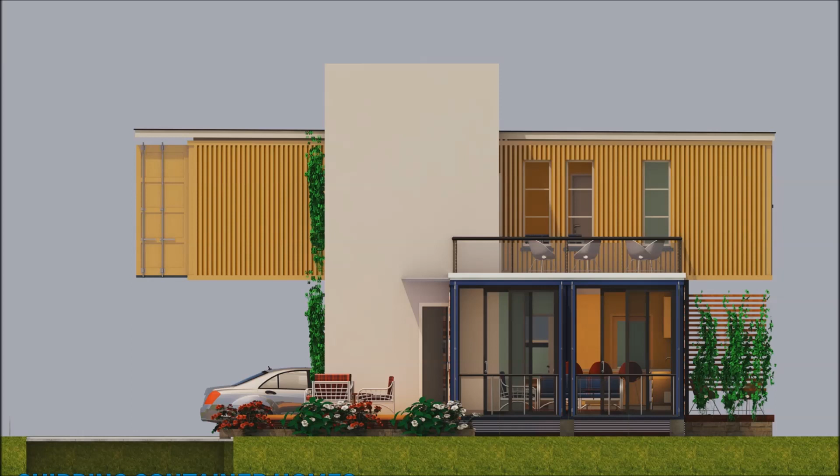This video brings to you CROSSBOX 1280. This is a modern shipping container house designed using four 40-foot shipping containers to form a 1,280 plus square foot house. This video covers a complete presentation of dimensioned floor plans, a cost estimate checklist, and detailed drawings you can download for free to use on your own shipping container house project.

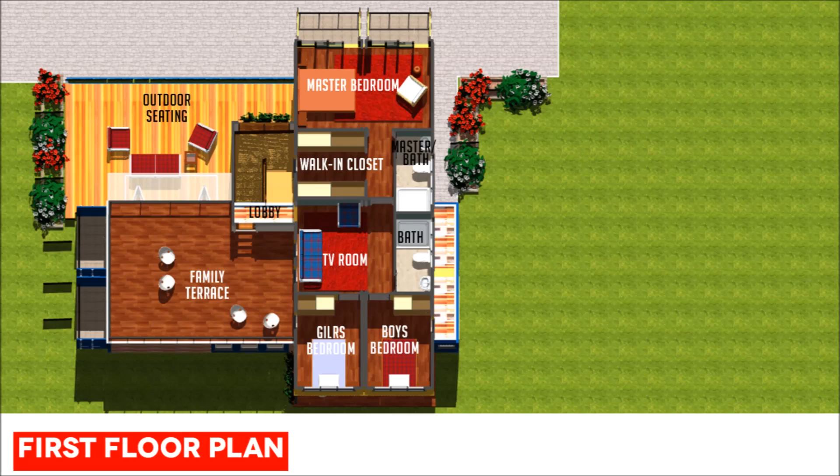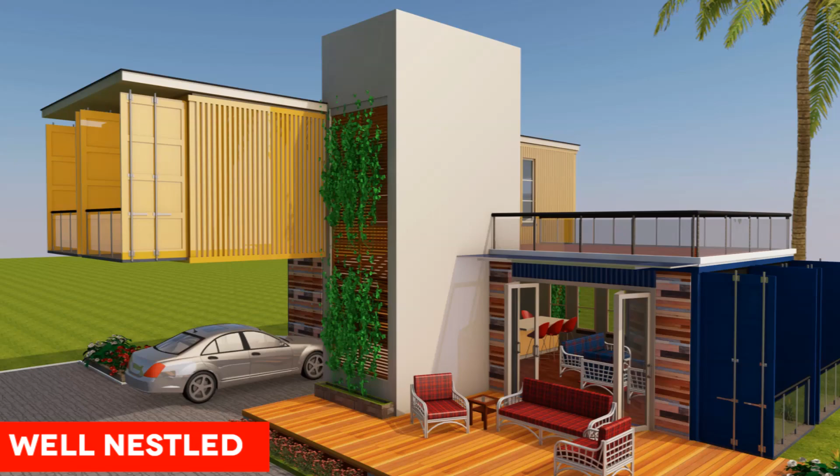The structure and design brief. This 5-bedroom, 1,280 plus square foot residence is made from 4 recycled 40-foot high cube shipping containers. 2 of the containers sit on a pier foundation and the other 2, stacked on top, perpendicularly to create a 2-storied house in form of a crossbox.

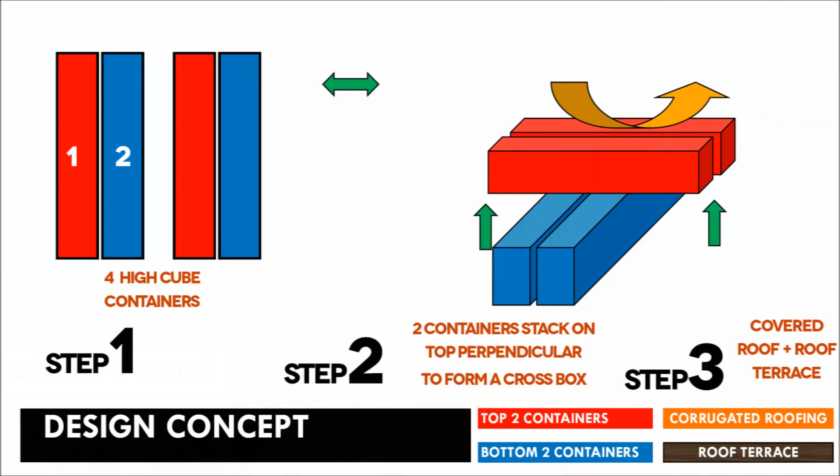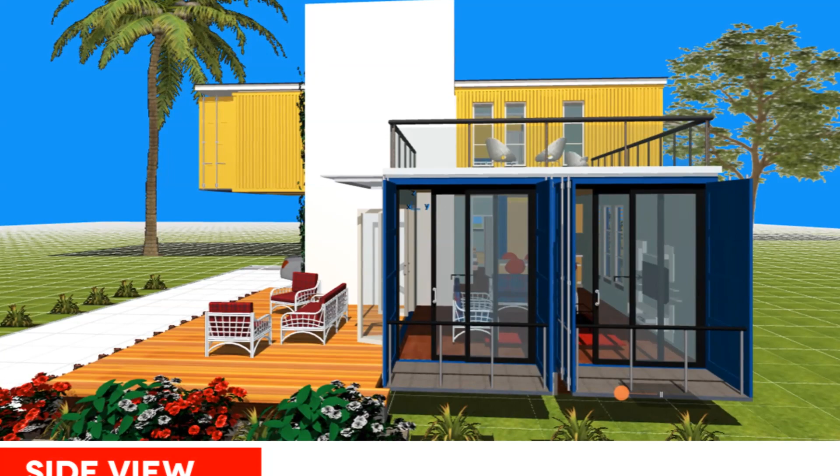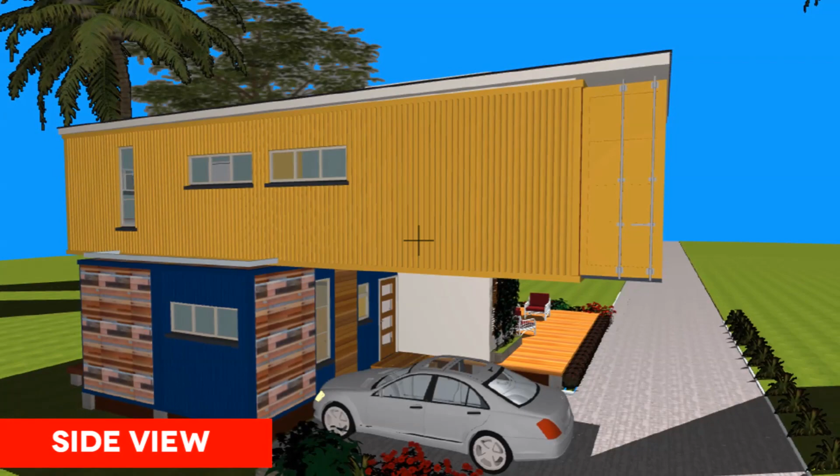The use of 2 containers is better in overcoming the challenge of narrow usable space of 1 container. The design uses high cube containers because they are 300 mm taller than a standard container. This provides an extra foot of ceiling insulation without compromising the headroom of the habitable space. The containers on the top are cantilevered midway to create a dynamic entrance porch and a carport. Another cantilever created at the rear of the building is used as a kitchen backyard.

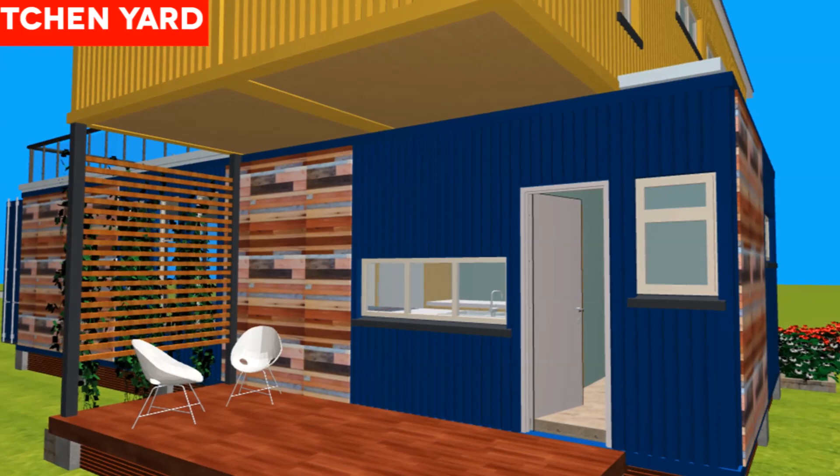The upper story is accessed with a hand-sculptured staircase, ventilated with timber louvered fenestration with green planted vines and climbers on the exterior. The staircase shaft acts as vertical circulation in addition to providing structural support to the cantilevered frontage. The top of the staircase is fitted with water storage tanks.

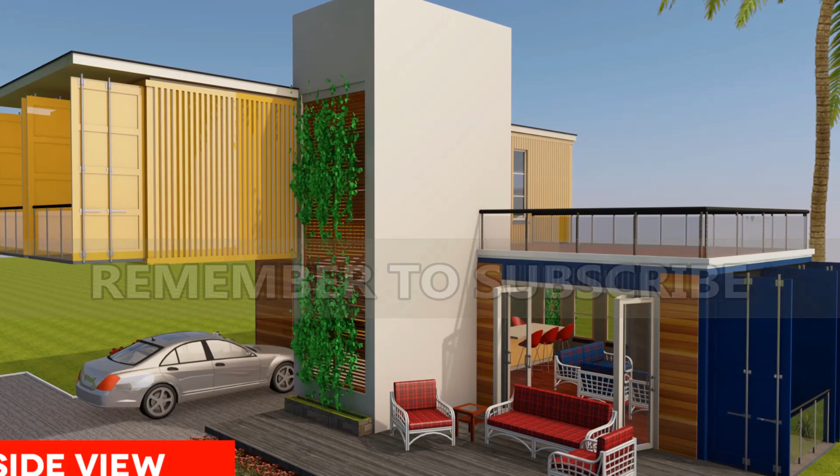The floating ends of the boxes are transformed into Juliet balconies to the living area on the ground level and the master bedroom upstairs. In addition, the resultant end panel openings are fitted with full-height sliding glass doors. Sliding doors are good space savers compared to swing doors, making them ideal to use in a container house. The balconies are fitted with glass balustrades to create that feel of lightness.

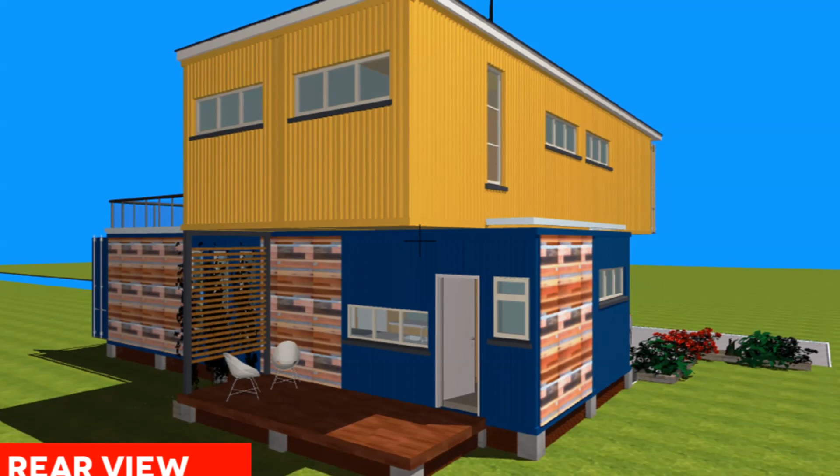As a sustainable design statement, the exterior of the upper-level shipping containers are left as they are, including its original yellow color and markings. This will help to preserve its charm with its history in addition to reducing costs on painting the exterior. The containers on the lower level have their original blue color interspaced with bands of timber cladding to enhance its exterior appeal. Depending on your country, budget, climate and local planning regulations, you can explore other exterior finishes.

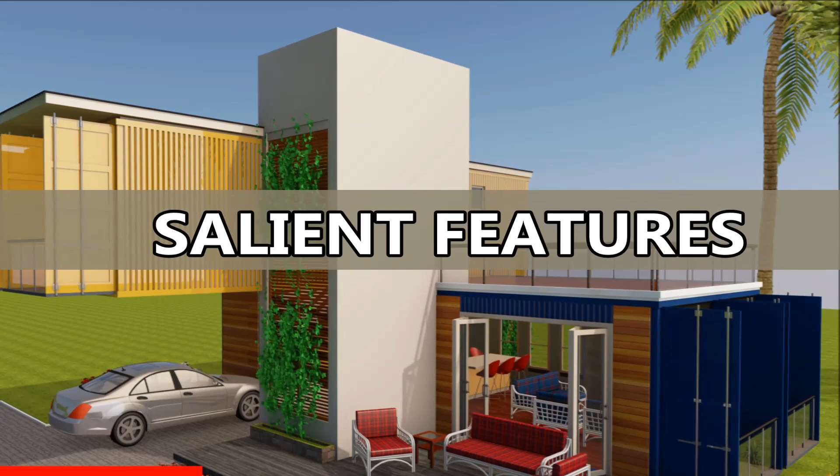This lavish house design is ideal for a large-sized family. If you have an extra piece of land, this design is a good investment as a guest house or a holiday getaway. You can have it listed on Airbnb and earn some extra income. The more public spaces and the living areas are housed on the ground floor. The spaces are comprised of the lounge, dining, kitchen, laundry, guest room and a cloakroom.

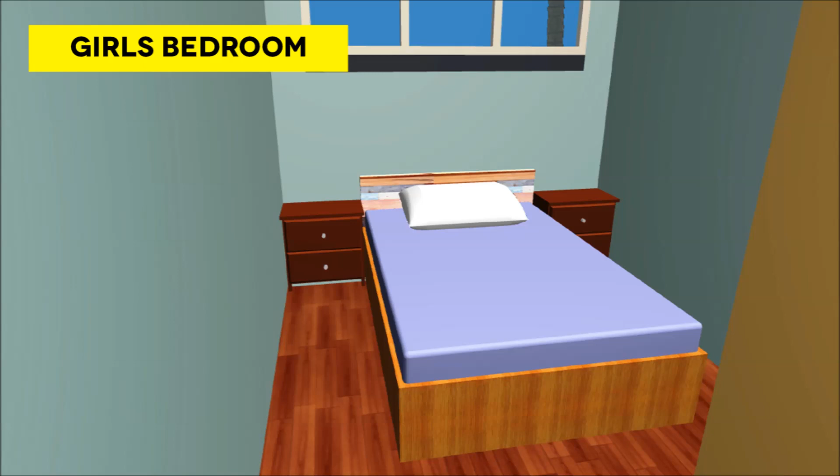The privacy gradient increases as you move upwards. All the bedrooms and the family room are accommodated on the first level. On the first floor, we have a master ensuite with walk-in closet, a common bathroom, a boys' bedroom, a girls' bedroom, a rumpus room and a family terrace.

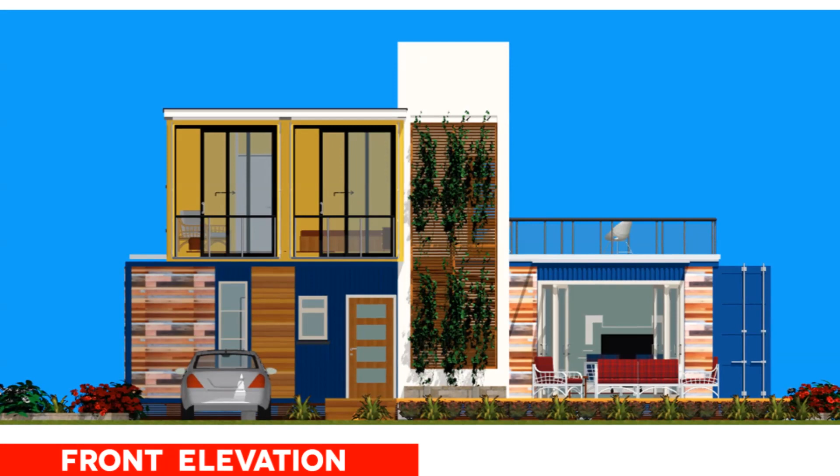Foundation and modifications. The containers sit on a reinforced concrete pier foundation to elevate them from moisture. The foundation is made of 16 300 mm square by 450 mm high concrete piers, spaced 3 meters apart center to center. For a storied container house, remember to consult a structural engineer on the size and the load-bearing capacity of the foundation piers to use. This pier foundation allows for continuous airflow to keep the container cool and enable plumbing with ease.

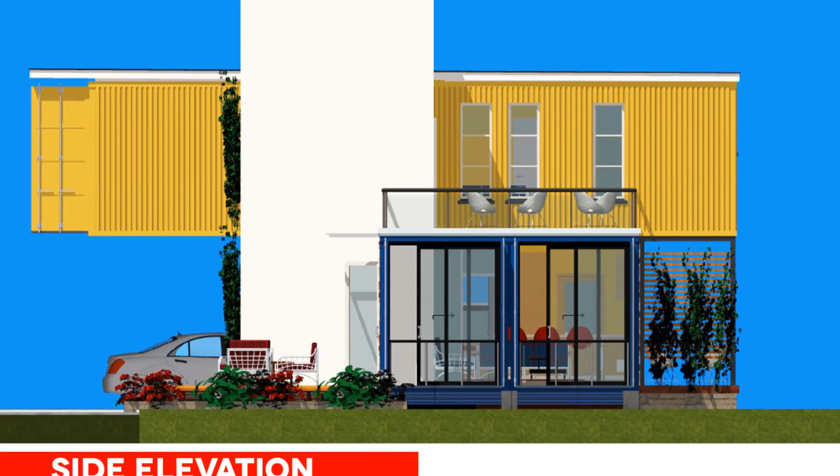Walls of shipping containers are inherently structural and load-bearing. In addition, shipping container modules are designed to be stacked at the corners. Loading them at any other position or cutting out too much steel from the walls for doors and windows interferes with the structural integrity and strength of shipping containers. In this design, a lot of steel is cut out from the lower level containers to create a free-flowing living area space. This will greatly compromise the structure, hence need for further reinforcement with steel beams.

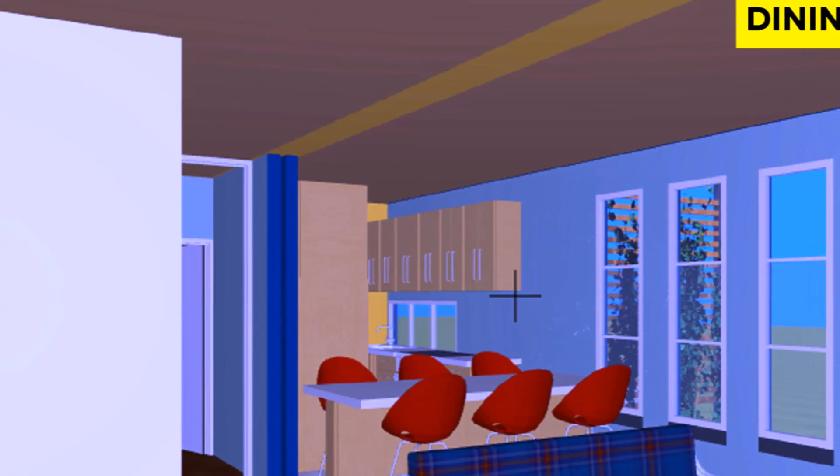Our design principle as shelter mode homes, we do not tamper with the roof and the floor of shipping container modules. It is very costly to restore the roof and the floor as compared with bracing and reinforcing the walls for window and door cutouts. Apart from the 2.4 meters by 2.4 meters folding door for the living room that will require further reinforcement, the other openings are optimal in size, hence have a minimal impact on the structural integrity of the containers.

Outdoor living space.

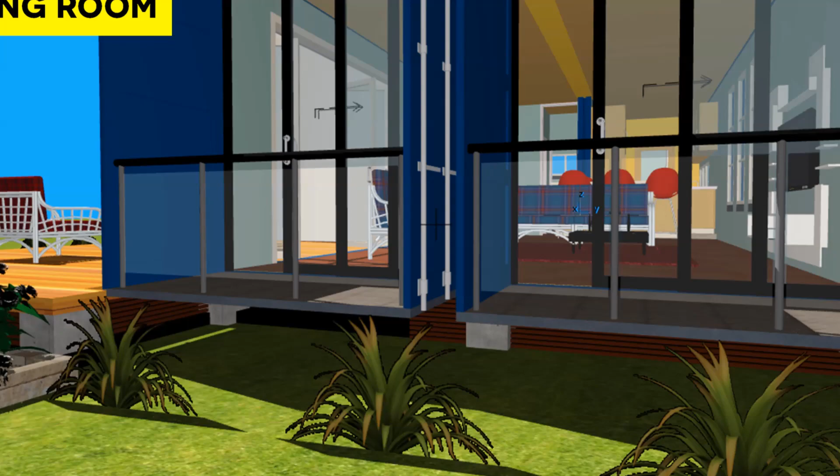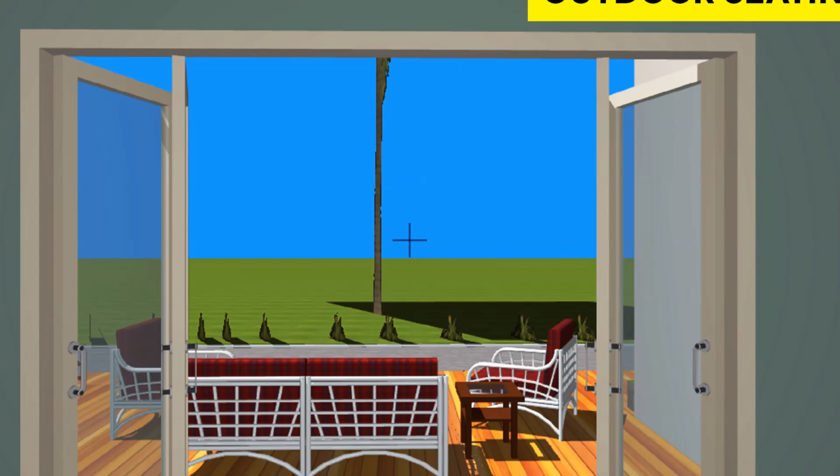Apart from the drainage and moisture benefits, the elevated position of the house provides the height necessary to construct a deck. A 3.5 meter wide deck is provided for. The length can be as per the client's discretion. A deck is a quick and easy way to add extra living space to a container home by greatly extending outdoors the compact living space inside a shipping container.

In addition, the roof of the lower containers creates a private family terrace on the first level, creating even more outdoor space. The terrace is accessed by a 2.1 meters by 0.8 meters swing door. An additional kitchen yard space accessed from the laundry room is provided on the ground level. The yard is well sheltered by the cantilevered containers above. The yard is shaded on one side by a trellis planted with native vines and climbers.

Furniture and interior design ideas. Fitting furniture into a shipping container home can be a challenge. Most furniture hasn't been designed specifically for such small spaces. Multifunctional transforming furniture and other space-saving essentials effortlessly transform from one use to another, allowing a single space to perform more than one function. To complement the industrial look of the container, it's advisable to adopt a minimalist design to make the narrow space feel somewhat spacious.

To minimize the claustrophobic feel of living in a shipping container, the walls of the living area are finished in monochrome light-colored paint. Since this is a container house, consider using similar materials to finish the kitchen backsplash and the bathroom walls, in order to maintain that industrial look. This repetitive theme creates harmony, therefore making the house appear bigger.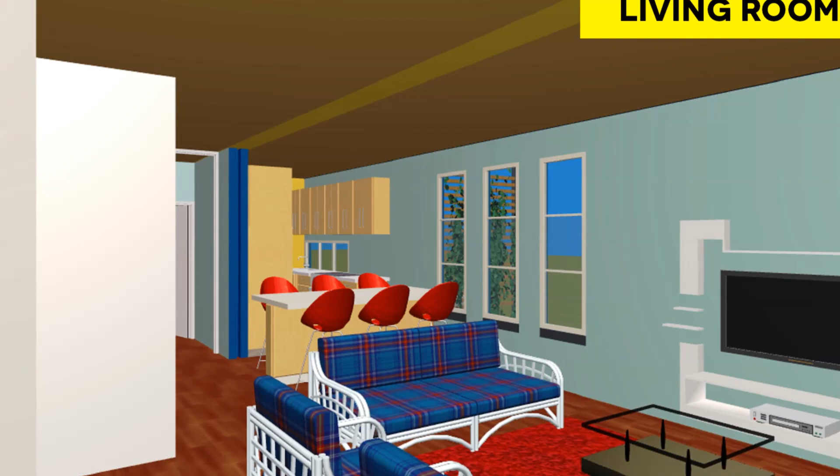Consider using a vertical wall bed or a Murphy bed in the children and guest bedrooms. This allows the space to serve both as a children's playroom and as a sleeping room. The transition from day space to night zone is quick and simple. Stackable chairs and easy lounge seats are used for the dining and sitting room respectively. Consider exploring other space-saving furniture ideas depending on the space needs in your container home.

Consider using flat-pack cabinets for the kitchen and the wardrobes. Flat-pack cabinets are good alternatives for the kitchen and wardrobe rather than custom units because of cost and quick installation. Flat packs can also be creatively used as space dividers instead of walls.

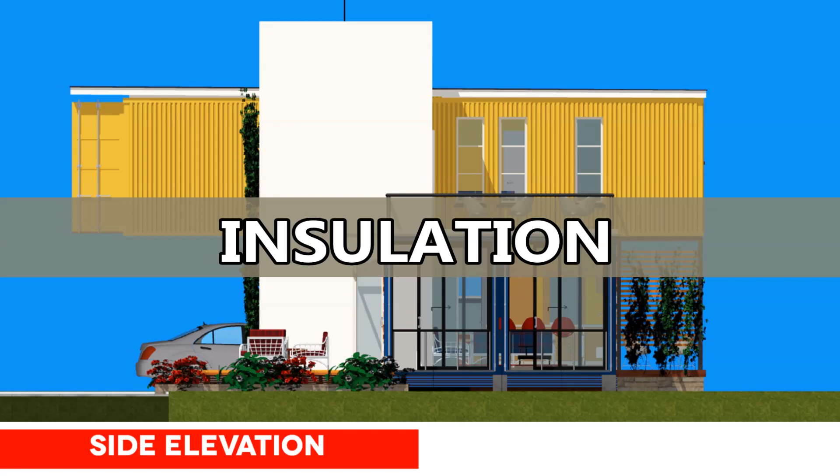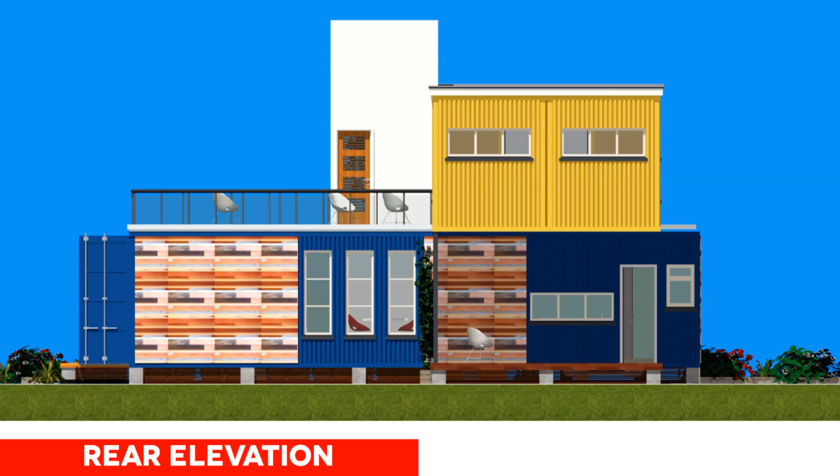Insulation and temperature control. Shipping containers are made of corten steel. Steel is a good conductor of heat, therefore, to live in a shipping container home, you need to insulate the exterior walls. Insulation is one of the most important aspects of turning a container into a comfortable home. Without insulation, a container home would be like an oven in summer and freezing in winter. Insulation is also essential to preventing condensation, which can corrode the container and form mold.

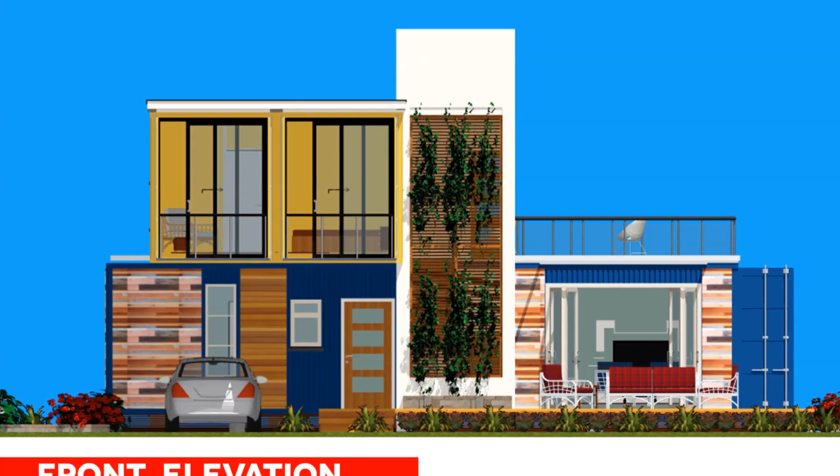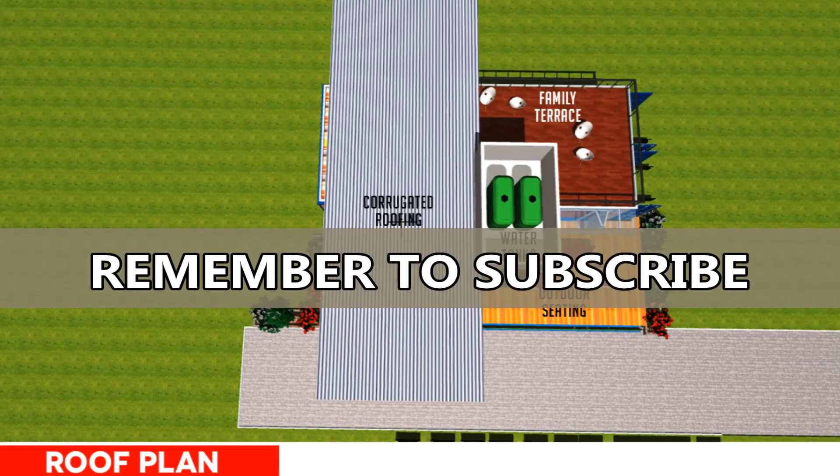Use spray foam insulation on the walls and ceiling to provide an airtight seal and prevent condensation, if you can afford it. In addition, put a layer of earthwool insulation blanket, then line it with plasterboard for adequate temperature control. The cantilevered containers are covered with an elevated corrugated steel roof to guard them from rain and direct sunlight. In addition, the corrugated steel roof is elevated above the container roof to allow for airflow to keep the container

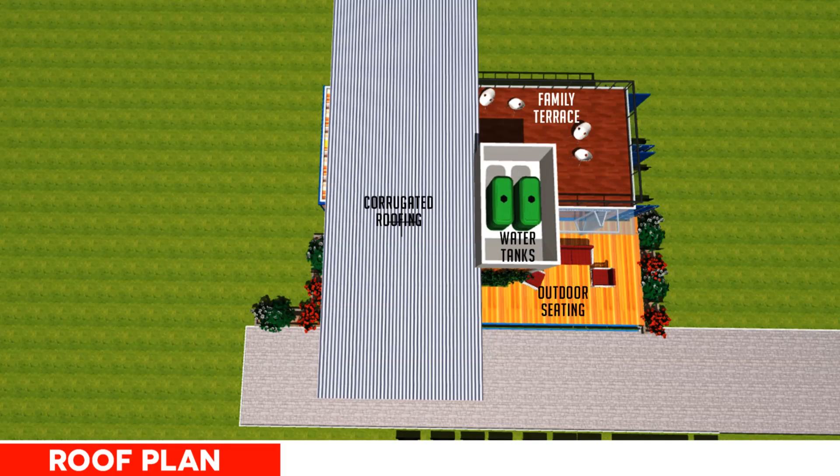interior cool in summer. The roof covers the entire containers with an overhang above the Juliet balconies, shielding the glazed openings in the master bedroom from direct solar radiation. This iconic roof is also a design statement that gives character to the house. The roof of the lower level containers has been transformed into a roof terrace with a 100 mm gap in between to allow for airflow.

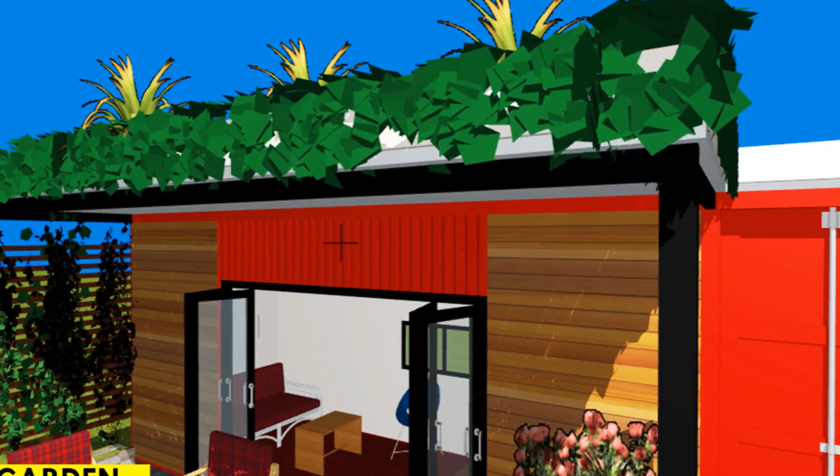If you are planning to use the container roof as is, consider covering the container top with a roof garden planted with native plants and flowers. Design the garden planter in such a way that it sits in a steel frame above the roof of the container, to allow for airflow and keep the weight off the non-structural container roof. The green roof adds both charm and natural insulation from direct solar gain.

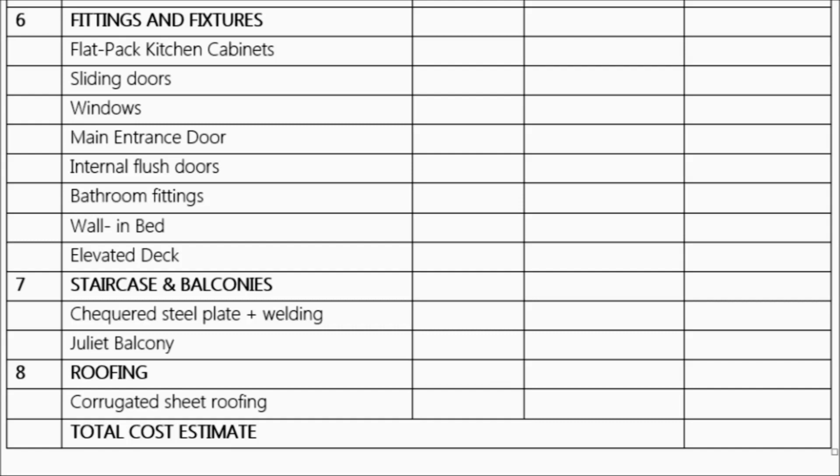The cost estimates checklist. This checklist is to guide you on the items to consider in your own container project. The prices of the items are subject to vary depending on your country, currency exchange rates, taxes, and government regulations. For correct and factual figures, consult the relevant experts in your country.